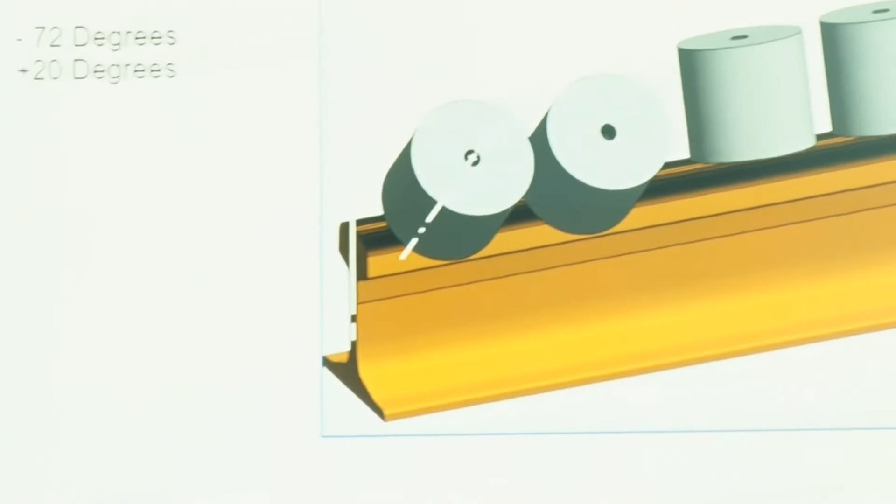Here you can see with our 12 stone vehicles, you have three double shaft packages on each side, which can set from an angle of -72 degrees inside of the machine up to 20 degrees outside of the machine. So like that you can grind the whole cross profile, also with the important radius inside to avoid the rail wheel climbing up the radius.

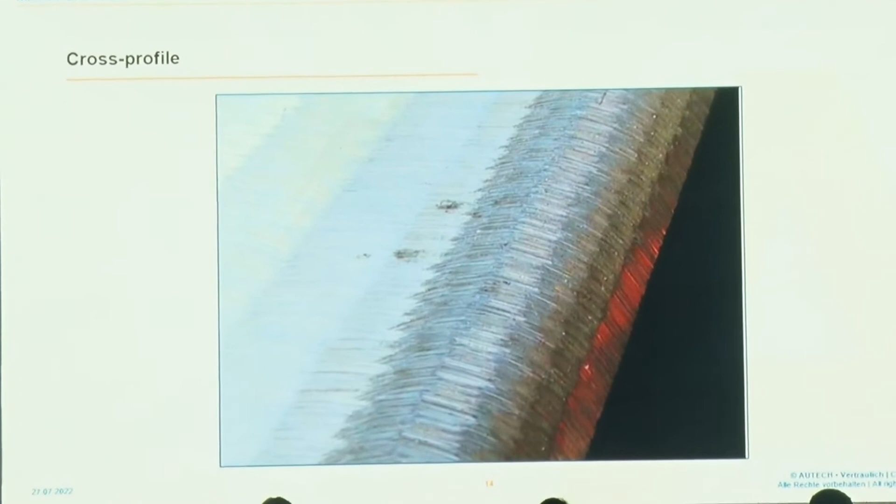This is how it looks like after grinding. As you see, from the right side onto the left side, there starts the radius by -72 degrees, and you have these small facets that get grinded by less pressure, and then the pressure gets higher once you get onto the head of the rail.

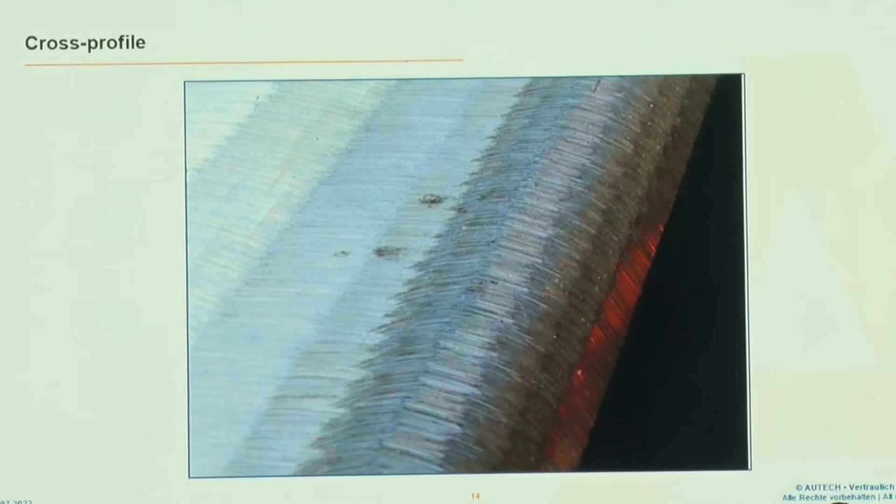How can I start it? Yeah.

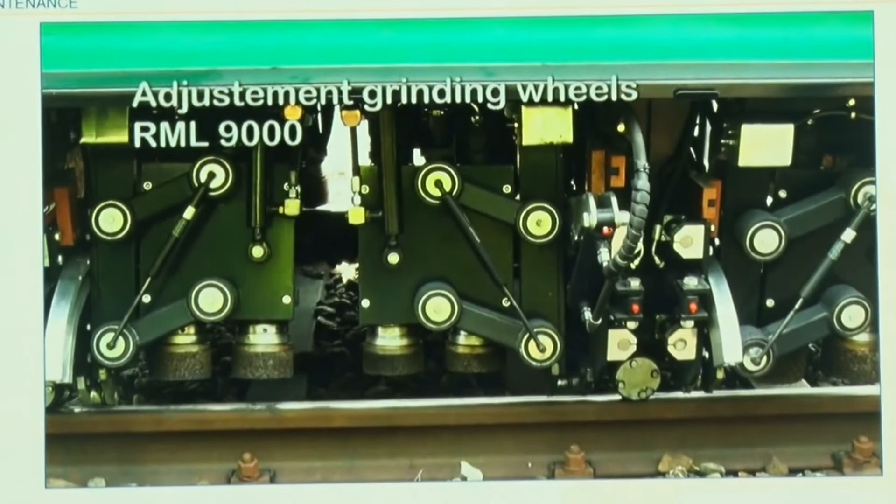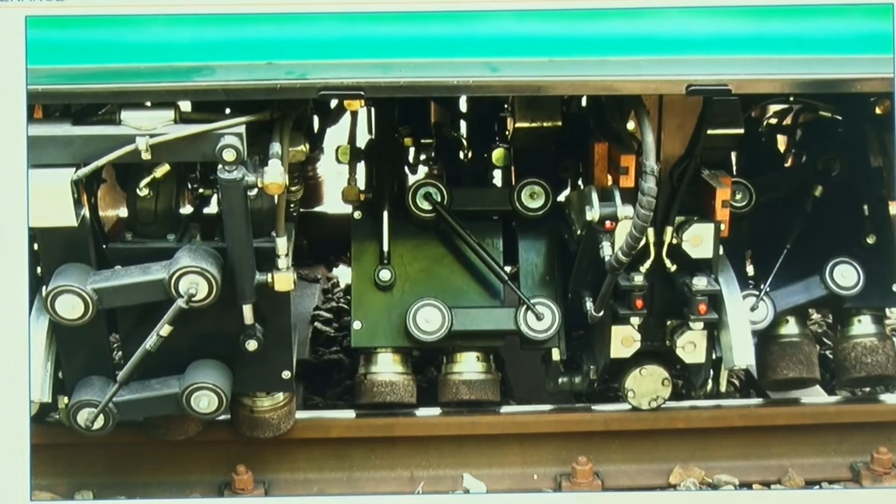Just to visualize that, we have a short video, so you see how the angles get set, and then grinding starts.

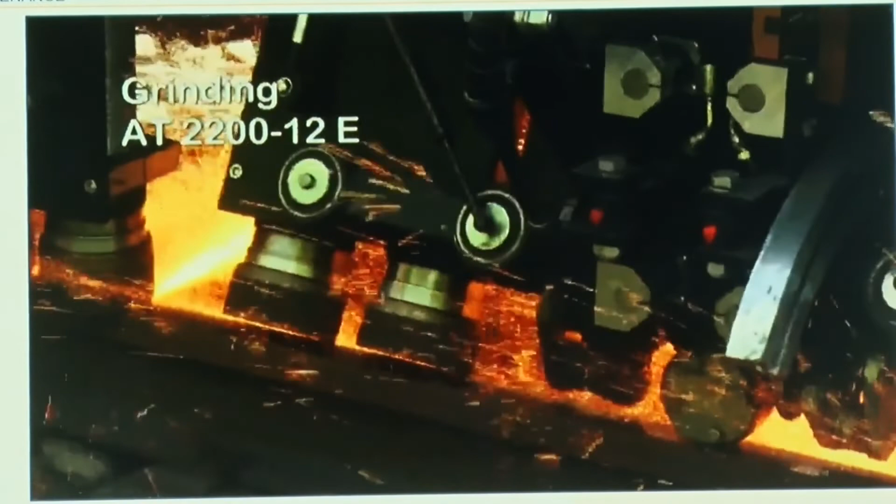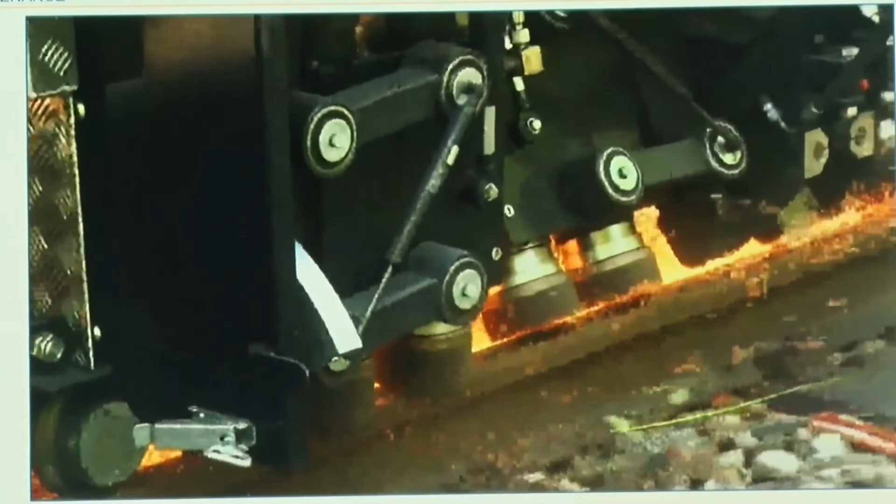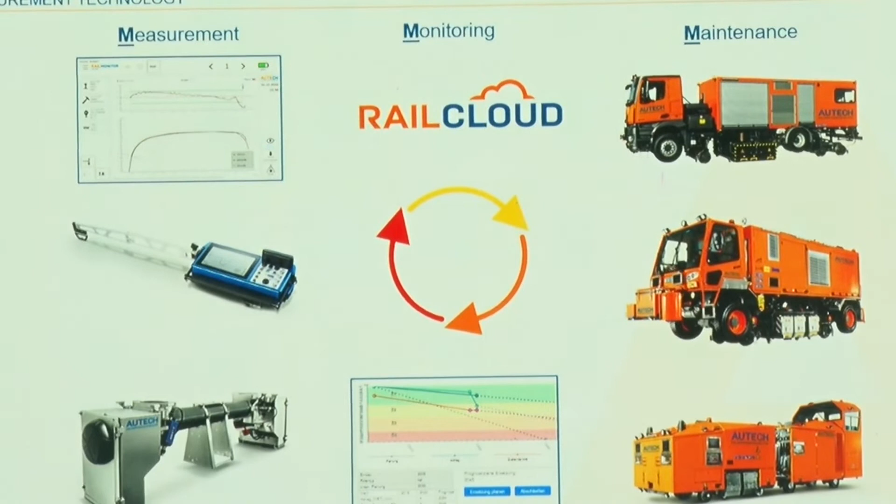All right, then we come to the credo of our company. So Autech is manufacturing it all. We believe in measurement, monitoring, and maintenance, the 3 M's. So it's all provided by Autech.

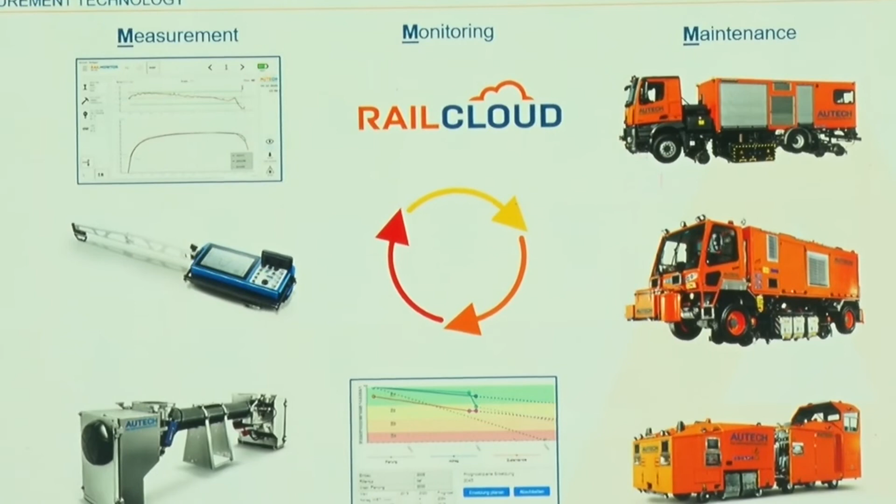First, you measure your rail to detect an error. Then you analyze and feed your rail cloud software, also invented by Autech, and you make predictions and studies about where to grind and what kind of shape your track is in. Then obviously you take our machines and go on track on your construction sites and grind that rail into new shape.

The different kinds of products in measurement technology: we have handheld devices that can be carried by one guy and measured before and after grinding, up to autonomous systems and whole measurement vehicles that can measure all the important values like gauge, square profile, longitudinal profile, etc.

Our most common device is the RML 3000, which can be carried by a normal operator. Once he goes on the construction site, he just sets that rail monitor on the track, and it will measure the square profile, so he knows exactly what the interface looks like. On top you can see he knows exactly on which part of the angle the error is set. So you see you have an error.

At the left upper corner you can see you have an error of 0.05 millimeters at an angle of almost 70 degrees. On the lower part of the picture it's more a visualization for the worker, so he can see exactly at which angle he has to grind a little bit more to get the rail in shape.

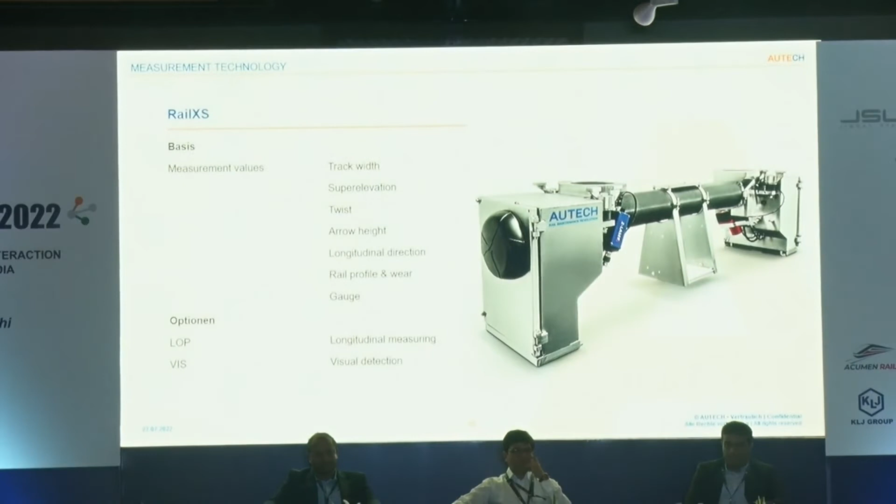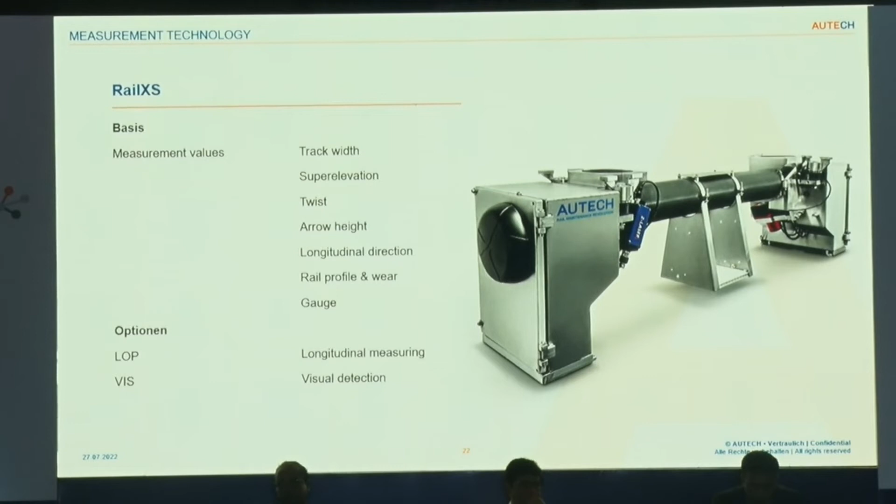Then we come to the RailXS. You can see this one as the Maserati of our measurement devices. It can measure all the important values I mentioned before. The good advantage is that you can mount it on a normal train or metro, and it can measure up to 100 kilometers an hour, so you can gather quite a lot of data in a short amount of time, for example when you have two of them sharing it with your lines going out of your city.

And then, of course, you have a lot of data. You measured all that stuff, and now what you want to do with this data is upload it in the rail cloud, also invented by Autech. As the name says, it's a cloud-based database solution with a very handy and smart user cockpit.

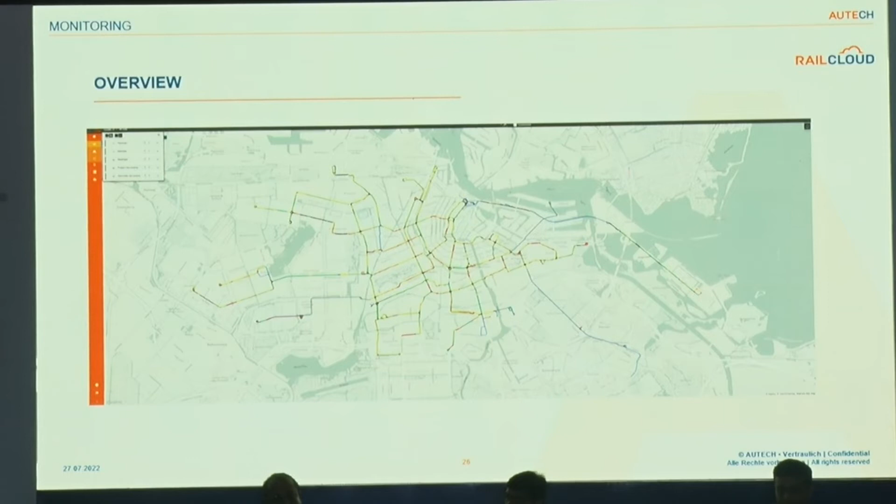This is how it could look like. You have green zones and red zones, and after you gather some data, maybe over a few days, some weeks, or best over some years, you feed the rail cloud with it, and you get this map where you can see the green areas and the red areas that must be maintained soon.

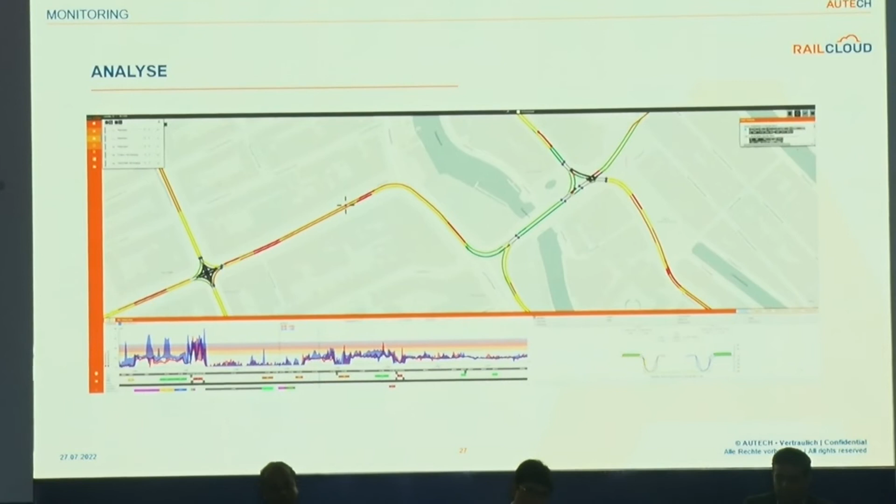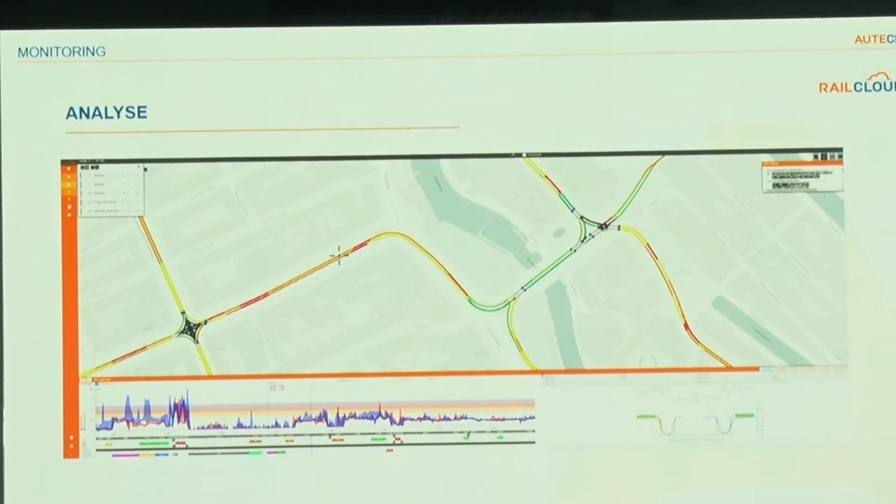You can also make analysis to do predictive maintenance, as we call it. When you take data from the past, you can make more or less predictions for the future, and then the software can tell you which part of the rail must be grinded soon.

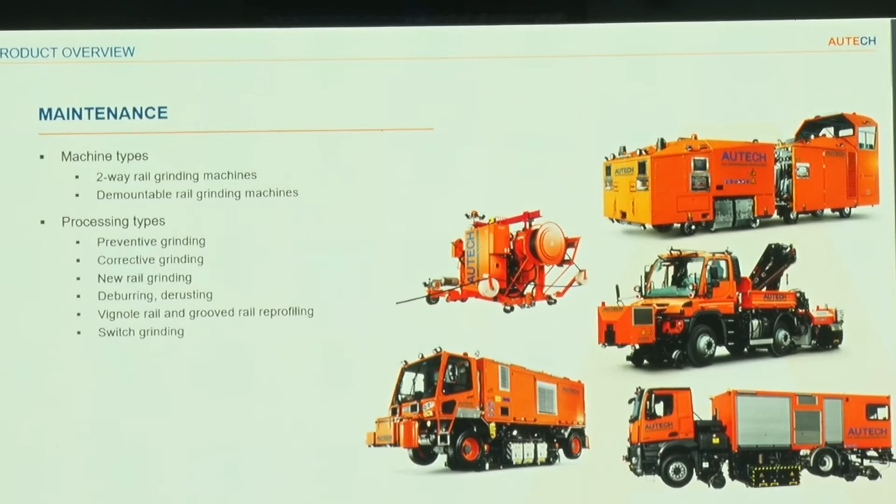Now my colleague will explain the advantage for the Indian markets of our machines.

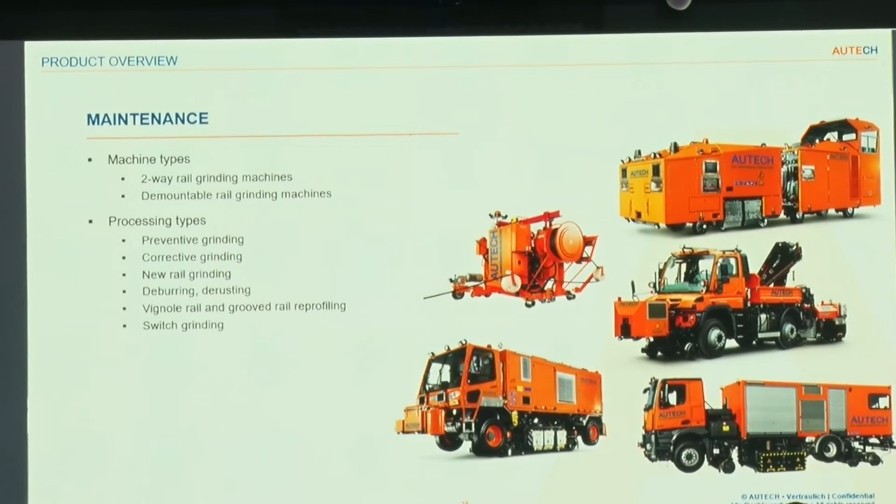Thank you, Simon. Coming to the last of the 3 M's, which is maintenance, Autech has delivered machines across the globe, doing all types of grinding required at different stages of a metro rail network. These include preventive grinding, corrective grinding, new rail grinding before CRS approval, and switch grinding for switches. All of this can be done with one single rail grinding machine from Autech, which is unique in itself. The AT2200 is their flagship rail grinding machine.

It has a grinding capacity of 300 meters per hour, which is quite fast. It is a 12-stone machine, and it also has a dust extraction system with a capacity of 10,000 cubic meters per hour. It has a machining range, as explained by Simon, of -70 to 20 degrees, and is mounted on a rail cum road vehicle. That is one of the unique concepts of Autech, mounted on a rail cum road vehicle, so the versatility of movement across different metros or even inter-depot movement is quite great.

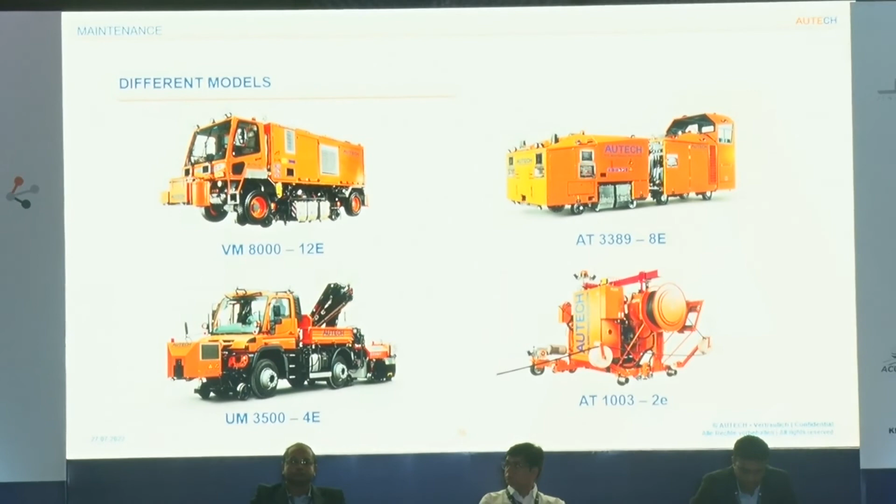Apart from the flagship product I just explained, there are other smaller machines depending on the size of the requirement of grinding. Ranging from a 2-stone machine, which is on the right bottom, we have 4-stone, 8-stone, and 12-stone machines which have slightly lesser grinding capacity than the AT2200. So all different types of metros can be catered to with the range of products Autech has.

What we provide is, in a single machine, we do switch grinding, which requires another machine for conventional machines. We can grind rails in very tight corners and curves where there are a lot of guide and check rails, which is very important because that's the part that gets eroded the most at curves. We do that with special disc technology which can be changed with the grinding stones. It is also capable of grinding in systems where there is a third rail running across the metro network, and we don't interfere with the third rail due to special protective systems we have.